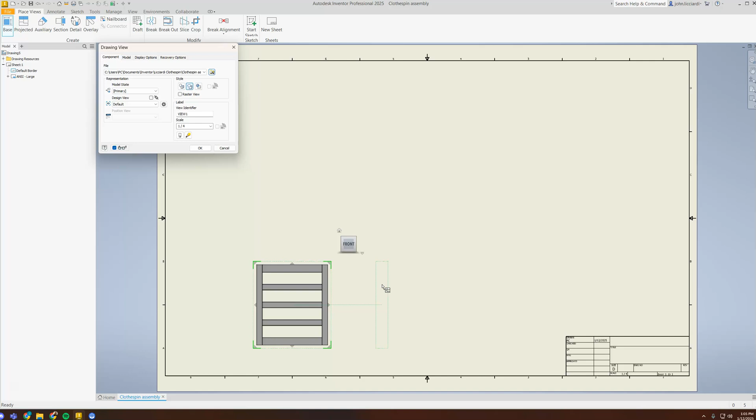So the first thing we're going to do is hit base, and you should be in your Clothespin folder. We're going to use the assembly first. Hit open. Now, with that being said, we want to use the assembly to try to give the audience, the reader, whomever, an idea of what it looks like in overall dimensions before we break it down.

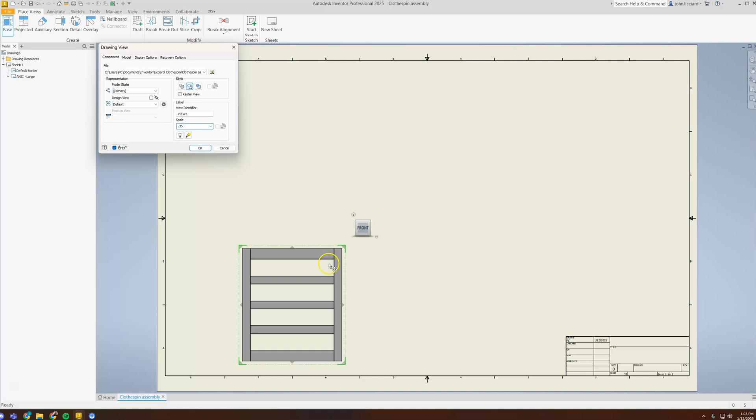You'll see that the scale is 1:4. This is just slightly too small for that, so maybe we can go from 1/4 to a bit more. So let's go 0.35. Okay, that should be okay. It's a little big, but whatever. So we're gonna hit OK.

So now I have what we call our front view. The top that I'm going to create and the right side are attached to the front view, you'll see, and then we're going to also create an isometric view, shaded.

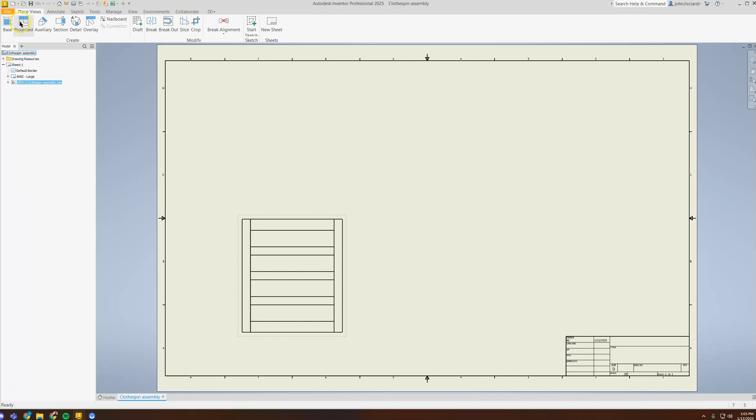So I'm going to go ahead and hit projected. If it doesn't automatically select it, you can go ahead and click on the piece there. So I'm going to place the top by left clicking, isometric, and right side. You see these three green things, that means you've placed them, so I'm going to right click and hit create.

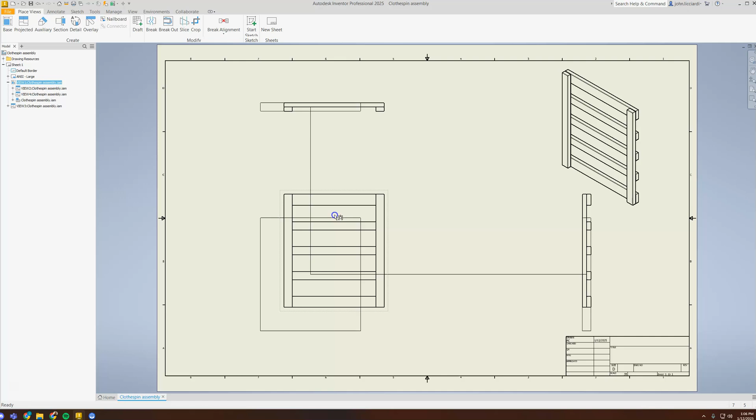Now if I click and drag, see these little red ant trails, I call them dashes, whatever you want to refer to them as. If I move the front, I move both the top and the right hand side. So I'm going to go ahead on the ant trails for the isometric.

I'm just going to simply double click and I'm going to shade, and that's all you do with the isometric. You don't do anything else to it.

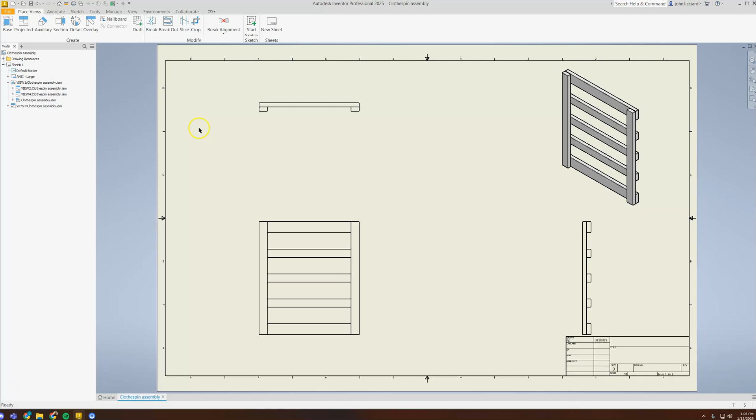So with that, we're going to go ahead and dimension all of the overalls. In annotate, dimension, we can't just do simple lines anymore, so we actually have to go from line to line. So I'm going to click on the left side, go over here, click on the right side, move up, click once more.

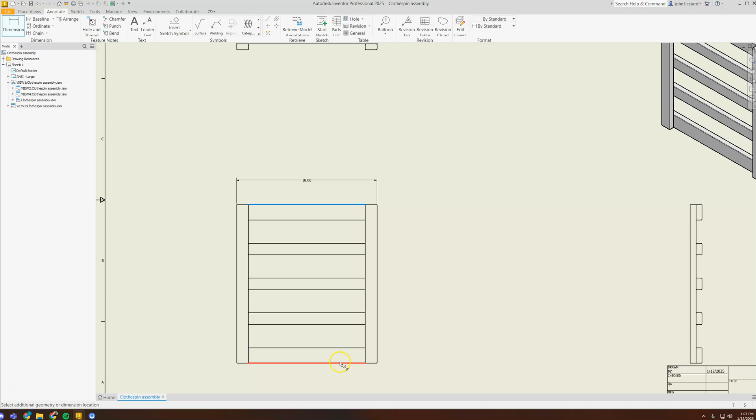We want to place all of our dimensions towards the other views, which is good. So I'm going to go ahead and click on here, zoom out, zoom in, click on here, and boom. All right, so we have the 20.50.

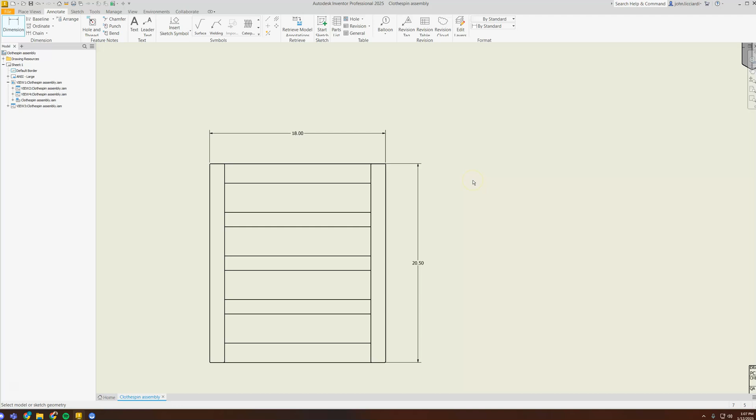Now, this particular drawing is going to have a lot more detail in regards to it, but we can kind of copy what we see in our project instructions. I do not need to break down each piece, I just simply need to give overall dimensions.

So last but not least, we're going to do the overall thickness. Now again, make sure to stay away from these little green dots. They're menacing. Sometimes you hit one and you don't want to, and it just doesn't do anything for you. Okay, so I've got a 1.50 there.

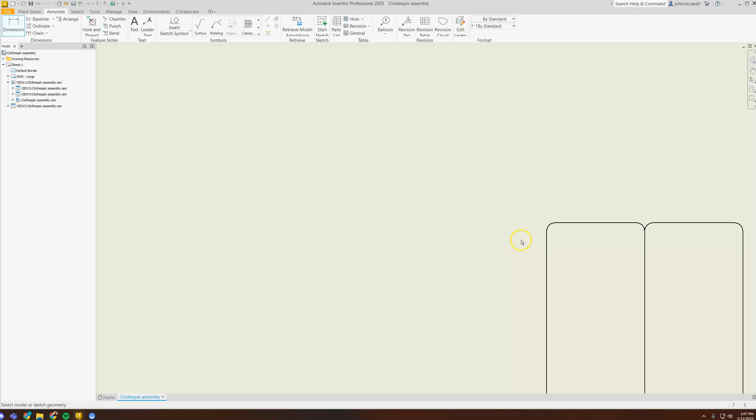One other thing that you need to dimension on this as well is the actual curve, that little fillet that we did, and that's where the little green dots kind of show up a lot.

You want to click on the edge, zoom out a little bit, and make sure to record that R.06. That's the radius we put on for the fillets.

Now with this, like I said, this has a little bit more in regards to our documentation of what this assembly should be. We still have to dimension in between here, so I'm going to go ahead and click inside and click inside.

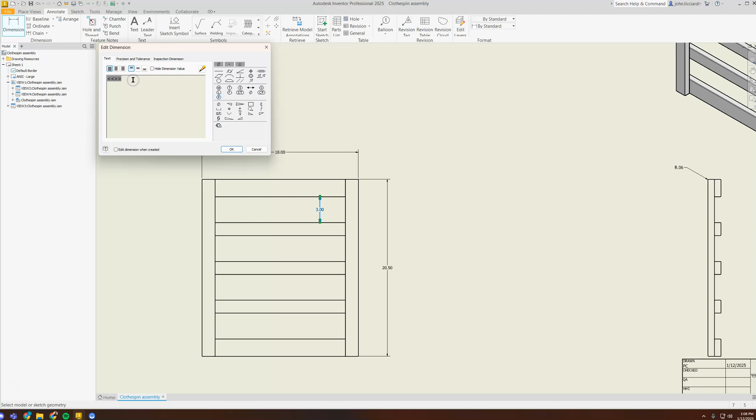Now I could just double click on this piece and it brings up an edit dimension. If you have it already popping up, go ahead and just uncheck the box, and I could put TYP. What that means is the gap in between pieces is going to be the same.

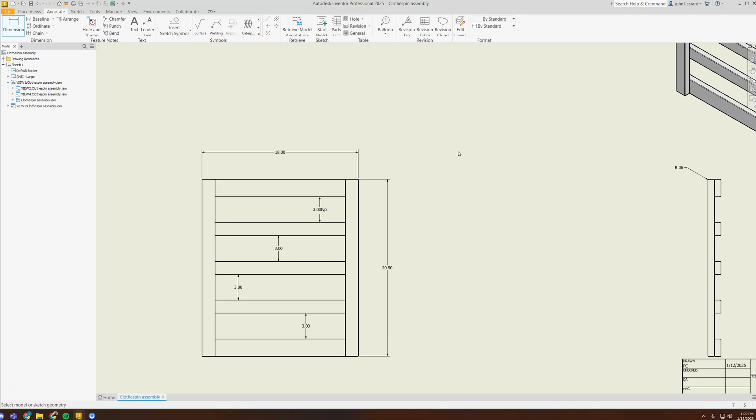That's one example of what you can do, or you can simply just do all three or four of them. You could also put ×4 as well. But as long as you understand that we're communicating all the location sizes of your items and whatnot.

So this is the first piece. We're then done with the assembly view. Now I'm going to press escape on my keyboard, get rid of the dimension tool, and go back to place views. I'm going to click on new sheet, and do the same exact thing for each piece.

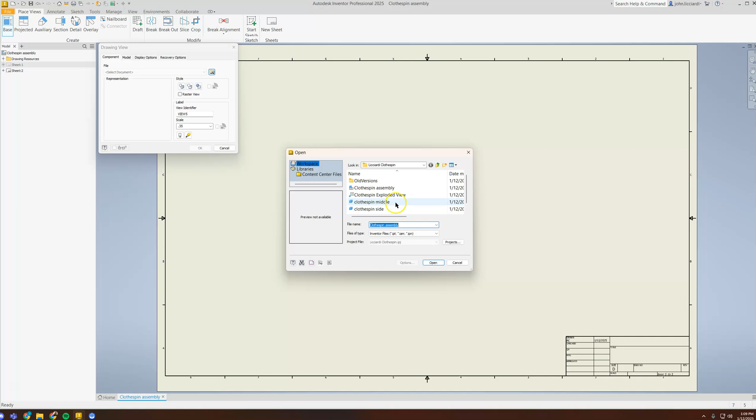We're going to go ahead and start off base. We're going to go find what we want to do. So let's do the side. No, let's just do the middle. We'll just stay top to bottom here.

Open, check out what kind of size it is on the panel here. This can be bumped up, I think. Let's try 0.75, that'll work. Hit projected, click on the piece. 1, 2, 3. Right click, create.

Double click and shade this again right here. And then we're going to go ahead and get into annotate and dimension.

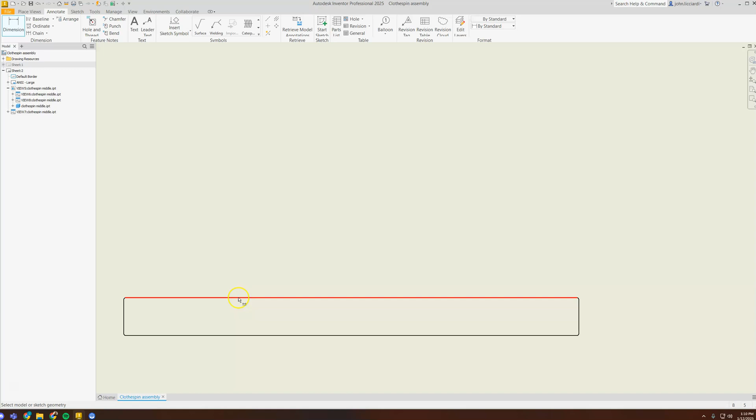Now if you try to annotate just this line, it's actually going to come up short, and the reason for that is because of these curves. So I'm going to escape my dimension tool, click on this and delete it, and then go back into my dimension tool and go line to line.

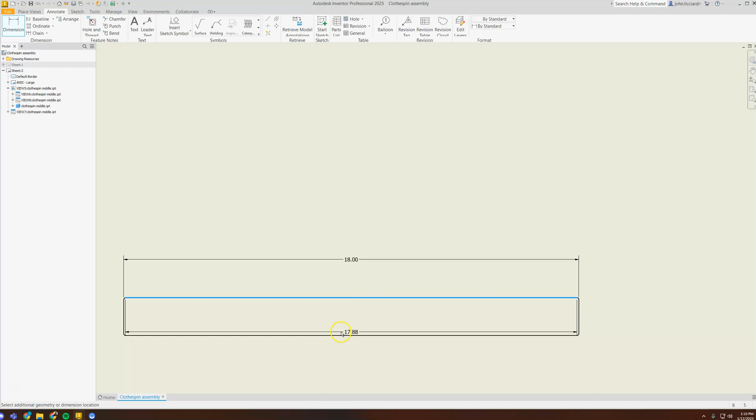So click on the left side, click on the right side, boom. Click on the top, click on the bottom, over. Perfect. Also need to get the thickness.

Now I did it last time on the top. I'm just going to show you how to do it on the right. So click on one line, other line, up.

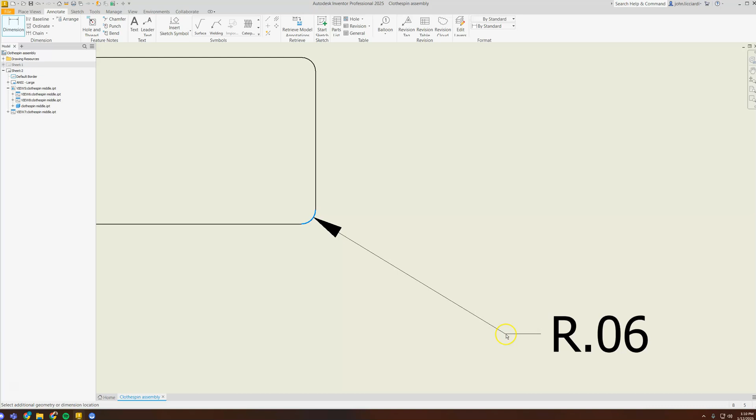And then last but not least, let's not forget to remind people of the radius. In this case, I'm going to double click on that, TYP it, because there's a lot of rounds on this piece. There's 4 of them, so that's that.

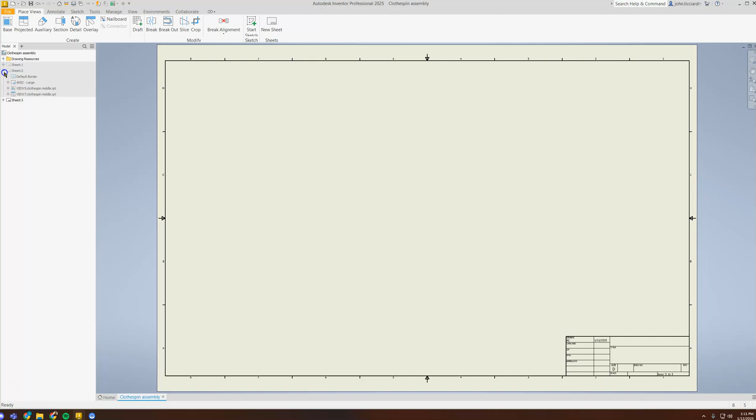We're going to just rinse and repeat, same exact thing. Go ahead and place view, new sheet. And you'll notice on the sheets here you can go ahead and expand these, but I'm going to go ahead, base. You can see all the pertinent information, what kind of part it is.

So we're going to hit side, is the next one. This could be bumped up slightly, 0.625 maybe. Perfect. There's no right or wrong. Just get it in there.

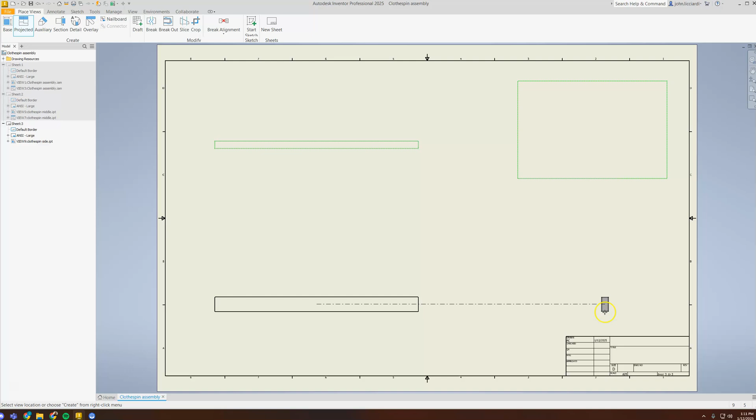Projected, top, isometric, right click, create. Shade, dimension. So we'll do the thickness here.

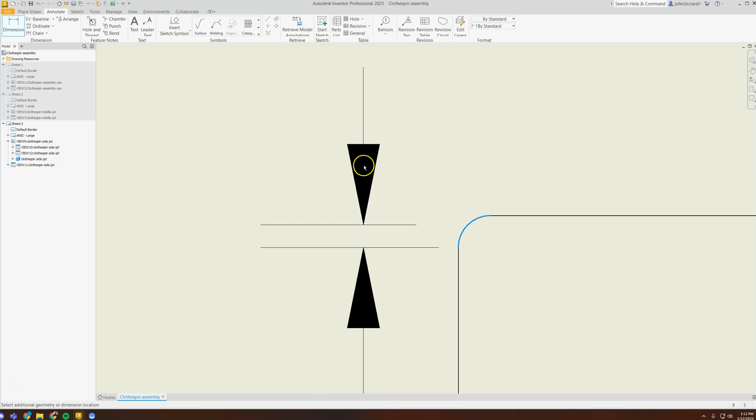A lot of times your front view is going to have a lot more dimensions. All right, so we got that, and then again, gotta stay away from those. Oh, got a dimension again. I must have hit something weird. Boom. All right, so I got that.

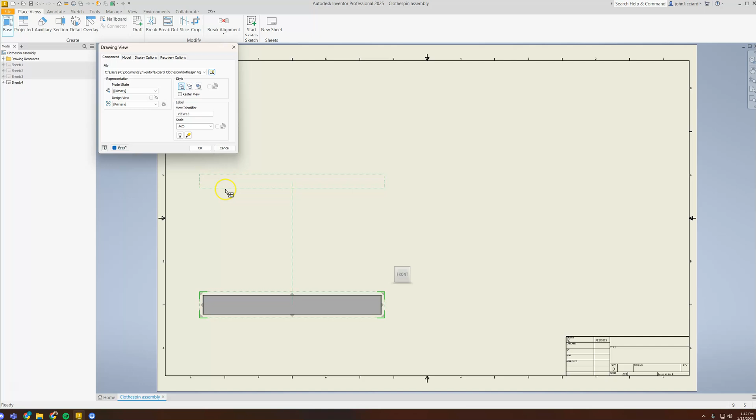Place views, new sheet, same thing over again. So this is top and bottom. That'll work. Position it here. Project 1, 2, 3. Right click. Create. Double click. Shade. And we're off to dimensioning again.

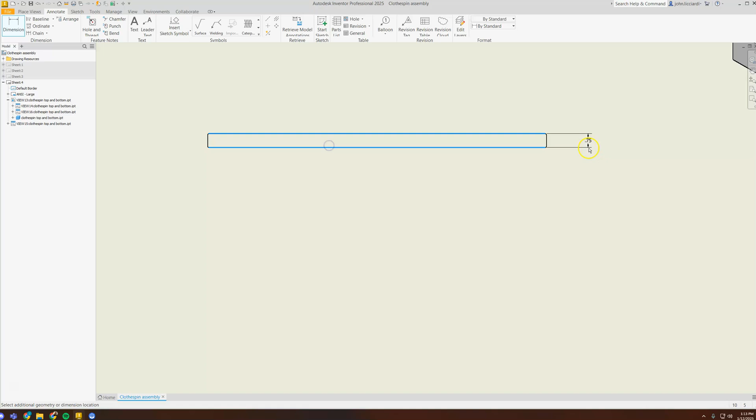So you can see that this is slightly repetitive on this stuff, but it is also important that you have different pieces - they may have the same shape, but different sizes.

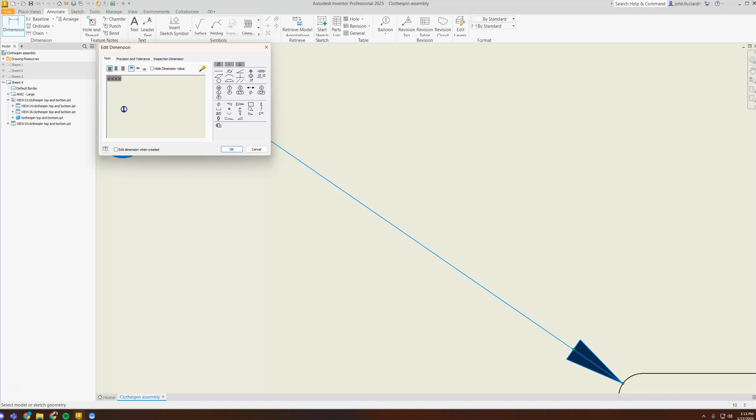All right, so now we've got basically all of our meat and potatoes here. Sheet number 1, if I double click, I can go and see it. All that good stuff, so you've got all that.

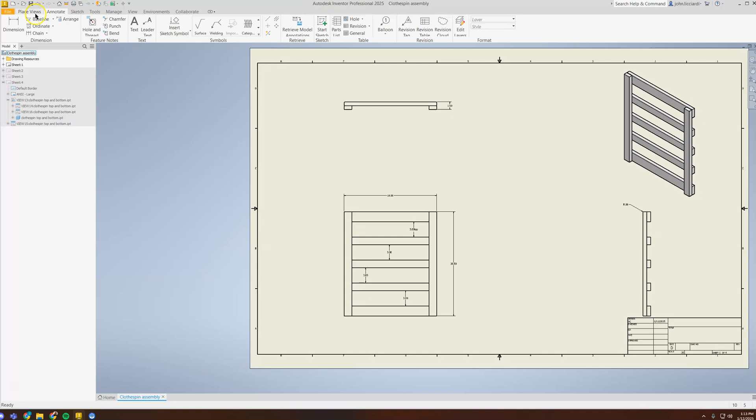Last one is, I'm going to go ahead and place views, new sheet. It's going to tack onto the bottom. We are actually going to do a base, but it's going to be different - in this case, we're going to grab our exploded view, and that's what it looks like. We'll hit open, and this is the only view that you're going to need.

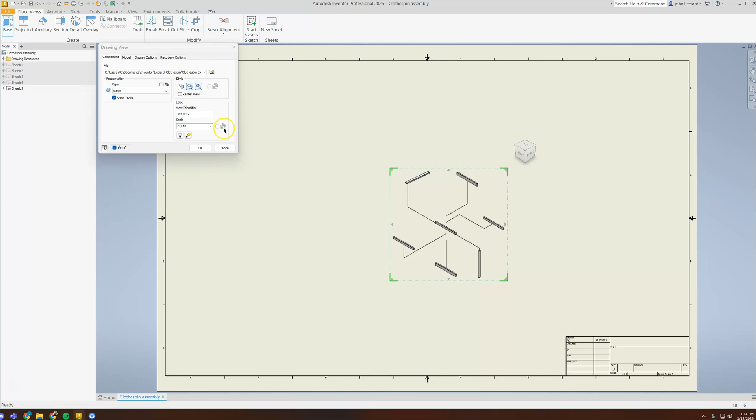So what we are going to do is increase this scale. Let's try to go 0.20, double size. Ooh, perfect - so it was 1/10, I just bumped it up to 2/10, or 1/5, whatever you want to call it. And I'm going to hit OK.

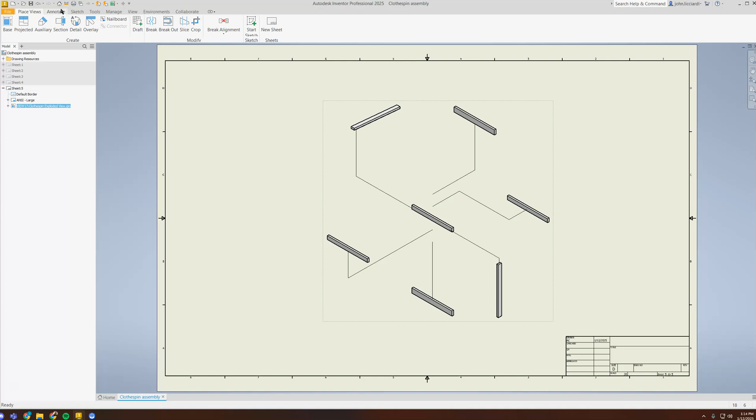All right, I'm going to double click, make sure this is shaded - yep, that is. Then you can kind of move this around. You're going to need some space around it because we're going to add what we call balloons and a parts list. So under there, I'm going to hit annotate, and choose balloon.

First thing I'm going to do is click on something, and it's going to pop up and say, hey, where are you getting these pieces from? And as long as it says your assembly, that's exactly what we want, because remember, we made our pieces separate, then in the assembly we brought it all together. So what it's asking for is that same file, that singular file - so Clothespin assembly. It's going to ask, do you wish to enable the bill of materials view? Yes, exactly.

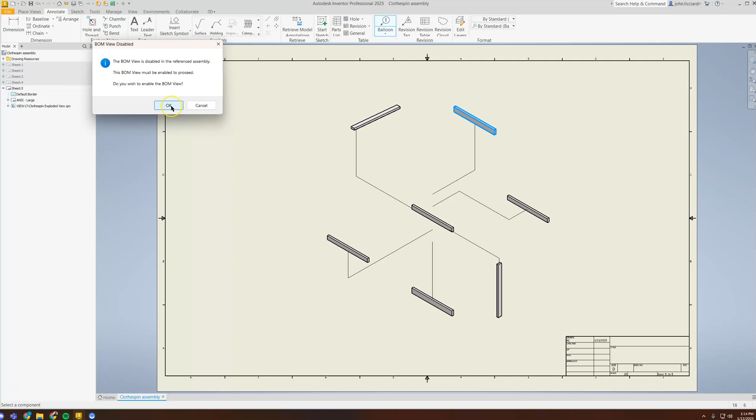So now that I'm clicked onto this piece, you'll see my balloon. I'm going to left click - okay, and I can click again. But once I left click that first one, I'm going to right click and hit continue. You'll notice that this balloon has a number, and that's going to pertain to a parts list.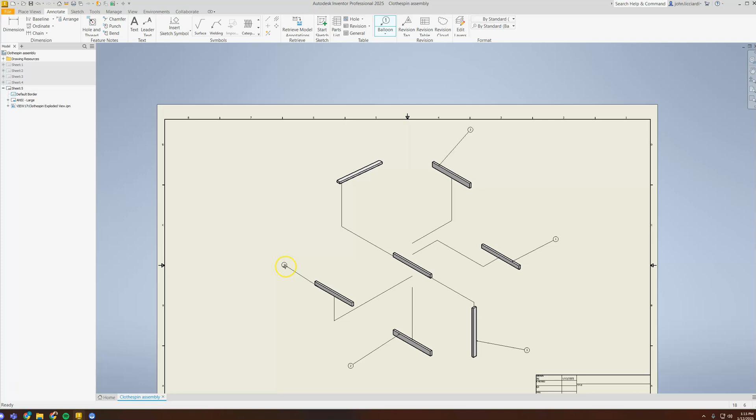All right, so this might be looking familiar. Click on the object, move outward, left click again, right click, continue - this is what you're going to do for the whole thing. Again, click on the piece, move out, left click, right click, continue. Left click, right click, left click, right click, continue.

Okay, so now once I'm done with that, I'm going to go ahead and hit escape, get out of my balloon tool. Let's move this just slightly over. And the last part is we're going to get a parts list.

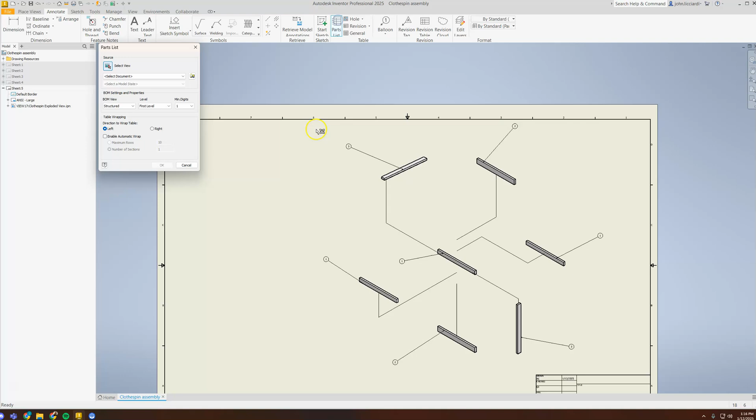Again, what we want to do is find the assembly - so Clothespin assembly - and then hit OK, and you're going to get a little box. So what it did is it went to your assembly, and in a table, put together all of your pieces, and this might look familiar.

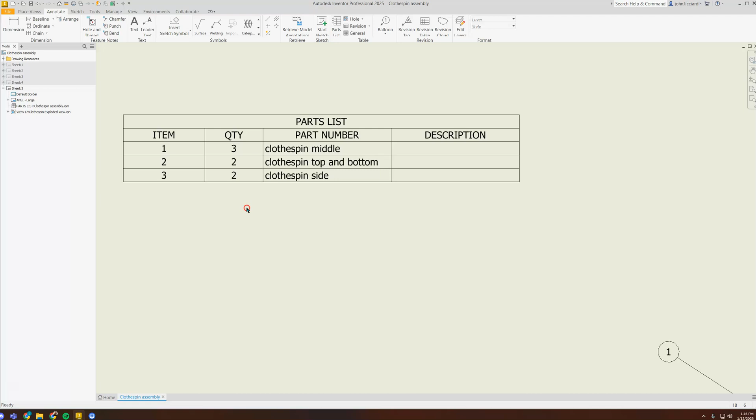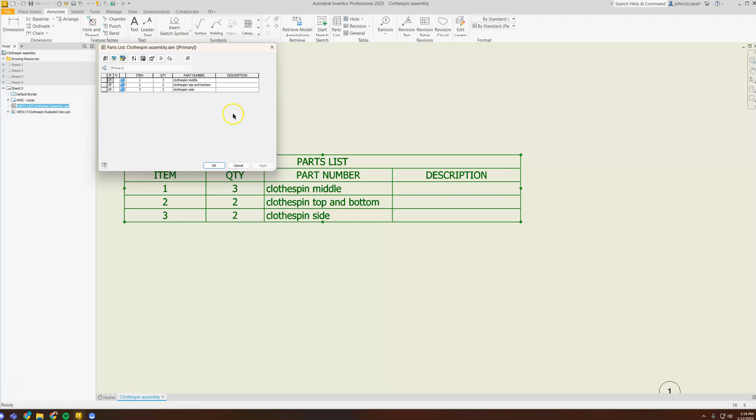So parts list, it says Clothespin middle, top and bottom, and side. It's got how many, the quantity or how many items you have. And then as my mouse comes over the edges here, I'm just going to double click, and you'll see in the description here, I can then go ahead and put numbers in.

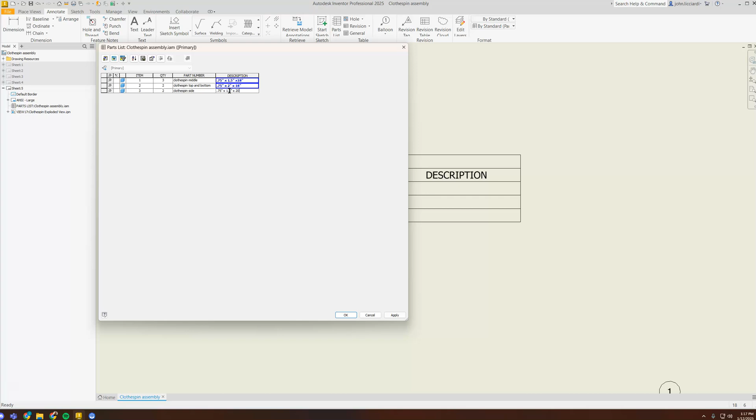So I know the Clothespin middle was 0.75 inches by 1.5 inches by 18 inches. And then the top and bottom was also 0.75 inches by 2 inches by - I think it was 18 and a half? No, it's got to be 18. And then last but not least, 0.75 by 1.5 inches by 20.5 inches.

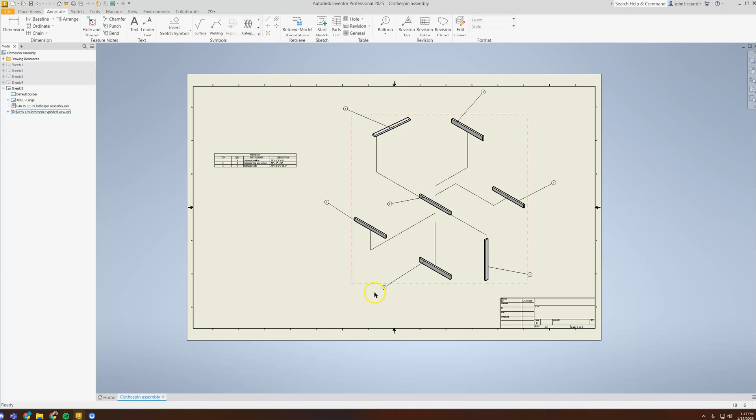So once you hit OK, you should see that description up in the box, and you are officially done. So if you look back, we went from basically starting everything, to assembling it, to creating a crazy animation explosion. Now we're into the final pieces, and this is the actual document that you are going to upload for your project, which you'll find in the next video. So I appreciate your time, and I'll see you then.